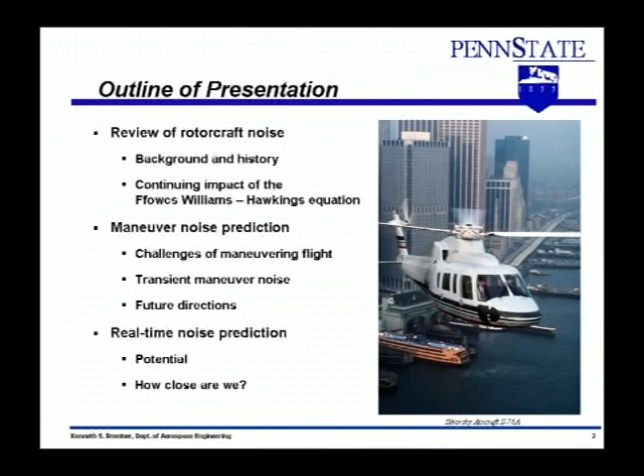Really, I probably should have gone before Jean, because I want to give just a little bit of an overview of rotorcraft noise. I know most of you don't work in rotorcraft, so I'll keep it at a light level. I'll talk about the maneuver noise predictions we've been working on for the last few years, and I'm very happy Guillaume Perez is now working on Aero, carrying that on. Then I'll talk a little bit at the end about where real-time noise prediction is going, which I think is fascinating.

Of course, the rotor environment is very complex. The blades are quite flexible, we have to calculate their elastic response. We have to worry about a vortex impacting the blade. In high-speed flight, we have shock waves on the advancing side, but on the retreating side we have dynamic stall. The wake from the main rotor can interact with the tail rotor. You have to do all of these things right to predict the noise, so it's a very complicated problem. Very good job security.

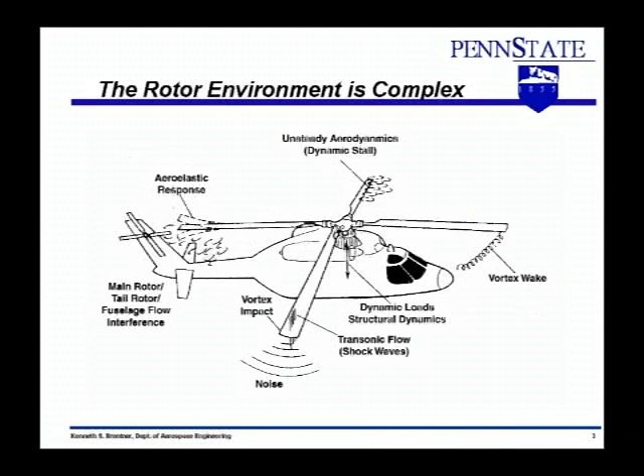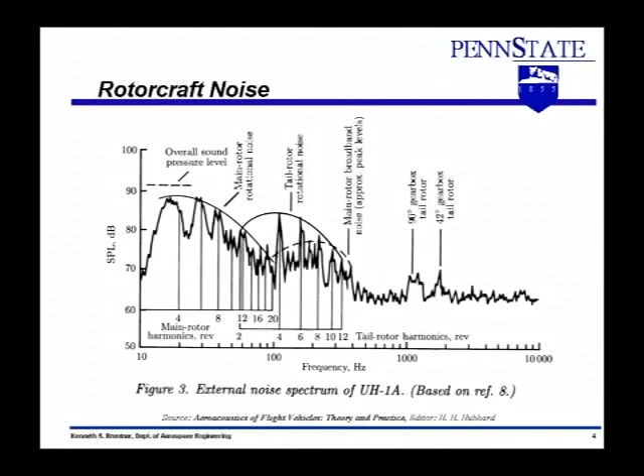Of course, when you look at the spectrum for rotorcraft noise, we have main rotor tones, tail rotor tones, even things like gearboxes. If you've ridden on a helicopter, you know that can be very annoying inside the helicopter. So there's quite a few things going on. I'm concentrating on main rotor noise right now, but as we look towards maneuver, we have to consider tail rotor and other sources.

Historically, Gutin and Ernsthausen and Deming started working on propellers early. In the 60s, early 60s, the importance of unsteady loading was recognized. Most of the main mechanisms were proposed in the 50s, although the names have changed somewhat. But there was really a dividing line here in what we were able to do and the level. It was mostly experimental with some theoretical work. But in 1969, when the Ffowcs Williams-Hawkings equation came out, I really think that's been a watershed and gave us the tools that we needed.

However, Farassat and others started the rotor noise theory at that time following Ffowcs Williams, but the computer power was quite limited back then, and we didn't have a very good idea of blade loading. Instrumentation was also not nearly as advanced as now.

In the 1980s, when I started getting involved, there was quite a bit of code development. In the US, there was the NR squared, the NASA rotorcraft noise reduction program sponsored by the AHS and the industry. A lot of industry people got involved. Joshi, I think you were involved in that program probably, right? At Bell at the time.

In the 90s, well about 1988, Farassat and Myers published the Kirchhoff formulation for moving surfaces. By the way, I don't want to forget to mention, Farassat sends his regards. He very much regretted not being at this meeting, but many of you might not know he just had surgery, a cancer in the mouth. I got an email this morning from him that he's doing well, and he's grown a mustache and sideburns.

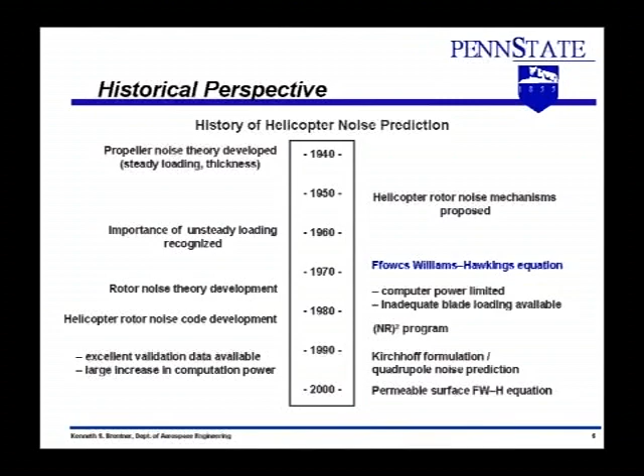But anyway, from about 1988 till about 1998, the Kirchhoff formulation was very popular, and now it's dead for rotorcraft, in my opinion, because we've replaced it with the permeable surface Ffowcs Williams-Hawkings equation, which you've heard about. The main point of showing you this is, I think, very important: 35 years later, the Ffowcs Williams-Hawkings equation is still the most important tool for discrete frequency noise prediction in rotorcraft.

This is after 10 years or more of CAA. This is true, and you've seen it in all the presentations, that Ffowcs Williams-Hawkings is still very important. In fact, we're using it to do things it was never intended to do, I think. We're beginning to calculate true broadband noise, trailing edge noise, literally any kind of noise source. I think that's a real tribute to the equation.

This is one form of it, the way that Farassat writes it. For those of you who don't know, I was at NASA Langley for many years under Farassat's guidance. It was actually Jay Hardin, though, that suggested I go study with Shon. And it's the Ffowcs Williams-Hawkings equation, as you'll know, a rearrangement of Navier-Stokes. That's the most general form, I think, of the Lighthill acoustic analogy.

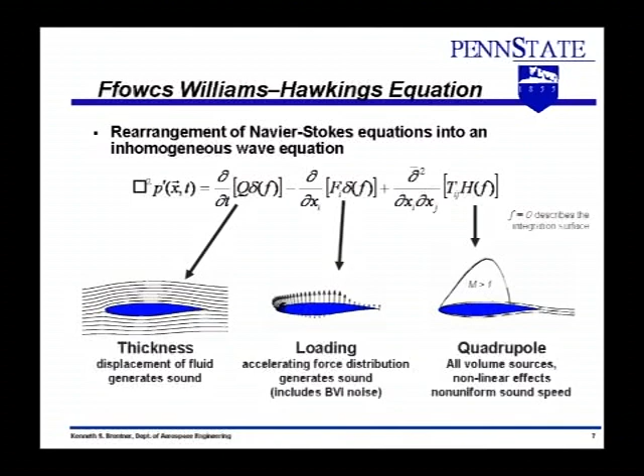The monopole term represents thickness noise, the dipole loading noise, and we still have a quadrupole term if you use the actual blade surface for the surface. If you have a permeable surface, there's no real physical meaning, and as Shon taught me, you can rearrange these sources in all sorts of different ways, so you shouldn't get too attached to them. I think of them as mathematical sources, not physical sources generally.

When we're using these terms, we have several approaches we could use. The acoustic analogy - we could integrate over the surface and over the whole volume, and that should give us an exact solution. In fact, we've done that for helicopter rotors in high-speed situations. Typically what we do, though, is neglect the quadrupole term because integrating over the volume is difficult. Even today, getting that volume data accurately, time-dependent, is difficult. So we typically neglect the quadrupole and just do a surface integration.

Now, the Kirchhoff formulation was attractive, and the reason it gained such popularity is because CFD could provide unsteady data on a surface. A surface integration is much simpler and computationally efficient. The Kirchhoff formula was based upon the wave equation, though, not Navier-Stokes and conservation of mass. What we've shown a few years ago was that it's really inappropriate for most rotor noise prediction - not because there's anything wrong with the equation, but because the input data we use is not suitable. It contains fluctuations in pressure and velocity that are not a solution to the wave equation. But the Kirchhoff formula doesn't know that. If you put the wrong data in, you'll get the wrong answer out. And that's what we've been able to show.

So the Ffowcs Williams-Hawkings equation, on the other hand, is essentially the same amount of work, very similar input data, but it's based upon the Navier-Stokes equations, and we don't have that problem. Another thing we could do is direct computation, but that, for a long time, will be limited to the relatively near field, and it's needed to provide input data to the other approaches.

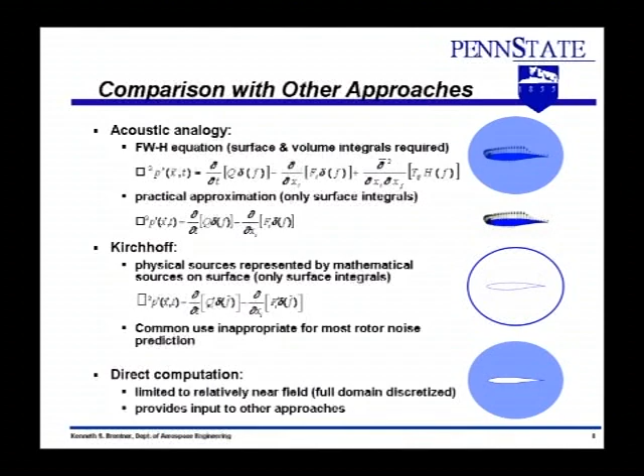So what we've been working on the last few years is maneuvering flight. How is that different? Why is it a separate problem? Well, first of all, in a helicopter already we have blade motions - the rotation, flapping. If you're a helicopter guy, you have to deal with this at some point. You have the pitching, all these things going on.

Well, now in maneuvering flight, you have the pitch and roll of the aircraft, and you can have transients. The time scales are much longer. For periodic motion, it's one blade passage, on the order of milliseconds. In maneuvering flight, it's the whole maneuver you have to calculate, so computation becomes an issue. The loads for each blade are no longer the same as in periodic flight, and the motions are different. And there's an increased possibility of interacting with the rotor wake, as John has already shown us.

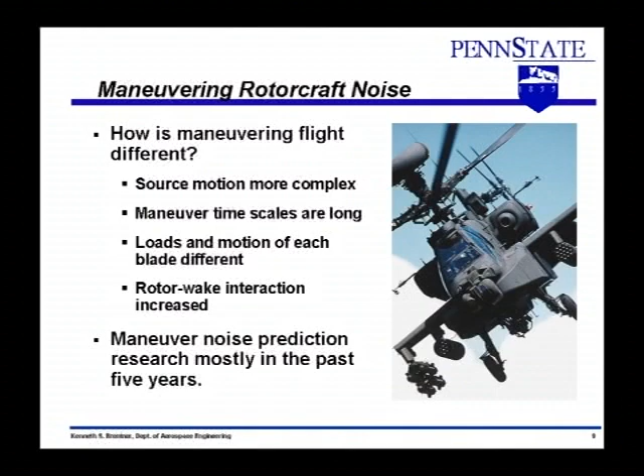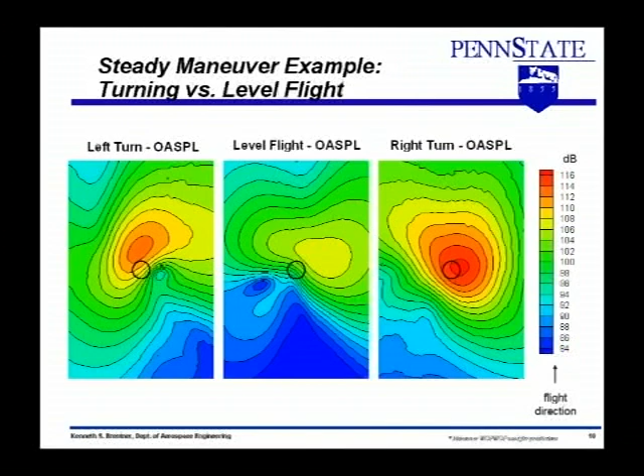In the past, there's been very little work done on predicting maneuvering flight, or even measuring it. Most of it's been done in the last 5 years. Just a simple example - and this is without blade vortex interaction noise included. One of the first things we did, just to show you, if we look at the overall sound pressure level on the ground for a helicopter doing a left turn, level flight, or a right turn, you can see that we get more noise in the turns, and it's not symmetric because the helicopter itself is not symmetric. So we get this kind of result right away.

What I've been interested in primarily, because we were one of the few people that could do it, is looking at the noise in transient maneuvers, what I call transient maneuvers. For example, one of the first cases we considered - and it was probably a poor case for the capability we had - is a helicopter in descent, where we would increase the collective pitch, increasing the angle of attack on all the blades simultaneously to stop the descent. Essentially, the rotor would produce more thrust. Here you can see the collective pitch: at half a second, it was increased by 6 degrees, and then by 1.5 seconds, it was back down.

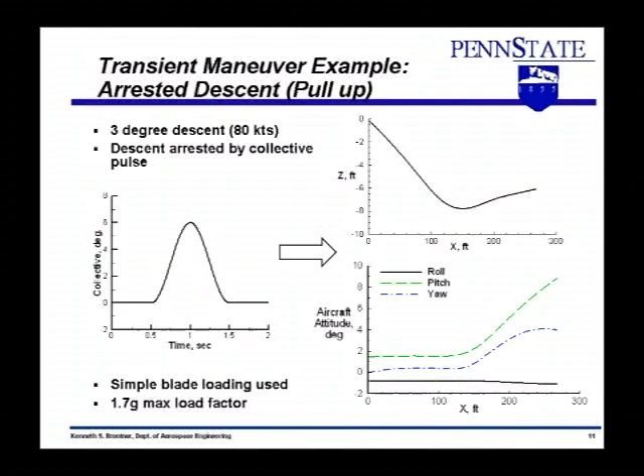And what happened is the aircraft pitches up. It yaws a bit because we didn't include tail rotor or pedal to stop the yaw as it produces more thrust, more torque. And we actually fixed the roll degree of freedom in our calculation for simplicity. It's one of the first calculations.

For an observer that was initially underneath the helicopter, you can see the helicopter in steady descent. This is acoustic pressure versus time. The green line is steady descent. The red line is the increased noise we get during a transient descent. So we get 3 to 4 times the amplitude of the acoustic signal over this short duration.

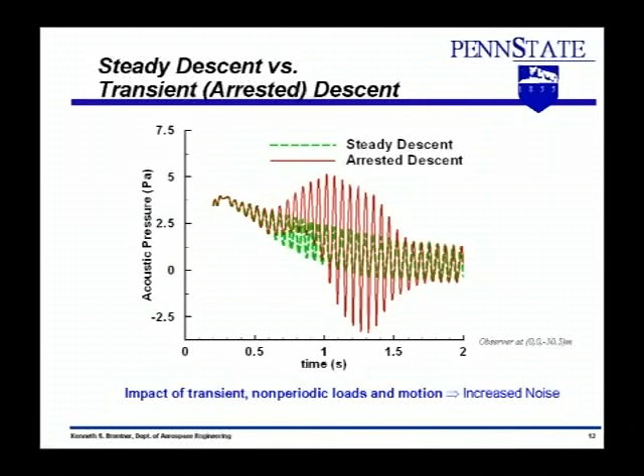This is without including the wake and blade vortex interaction, which is quite important. So in a transient, we can get a big increase in noise, and that's been neglected through all the years.

When we look at the contours on the ground, this is the Y direction, X direction at different times, as indicated. The top row is a steady descent. The bottom is a transient or arrested descent, pull up. This black circle represents where the helicopter rotor projects onto the ground plane.

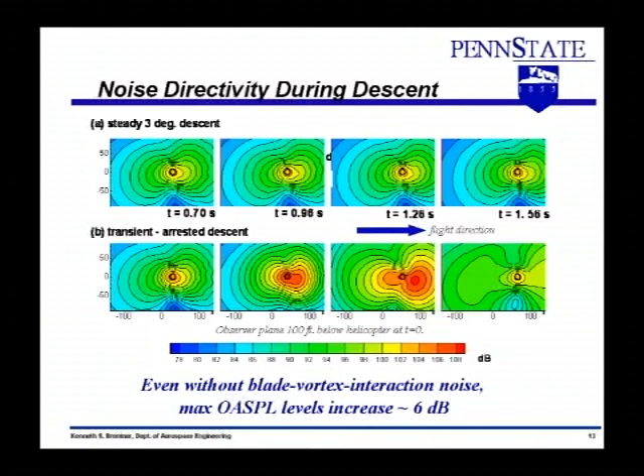You can see essentially in a steady descent, it's just moving, the pattern's moving along. It's getting a little closer to the ground, but only about 6 feet. In the transient case, you can see a large increase in amplitude on the order of probably 6 to 8 dB, maybe more. And that doesn't include blade vortex interaction.

So what we did is we teamed with the University of Maryland, and we coupled with a flight simulation code called GenHel. This is actually used by Sikorsky. They developed this particular version for NASA Ames, and they use it in flight simulators. The pilots are studying the flight dynamics of the aircraft.

We took the aircraft motion and blade motion from GenHel, gave that to the University of Maryland, Gordon Leishman and his students. They have a maneuvering wake code. They calculated using a free wake the blade loading and the motion of the blades, the flapping motion. We put that back into our code PSU-WOPWOP. We also could go directly, and then we could calculate the maneuver noise with BVI.

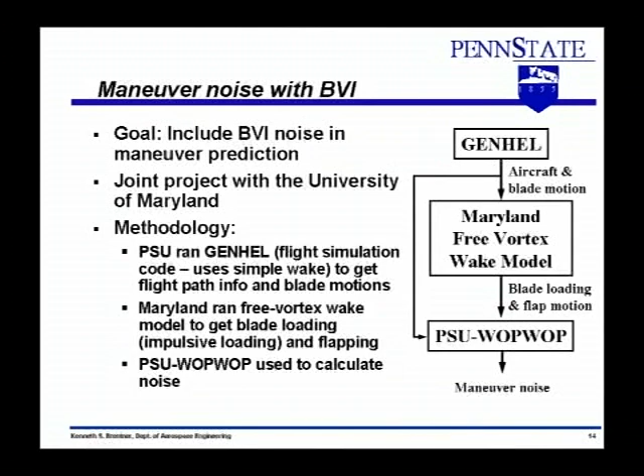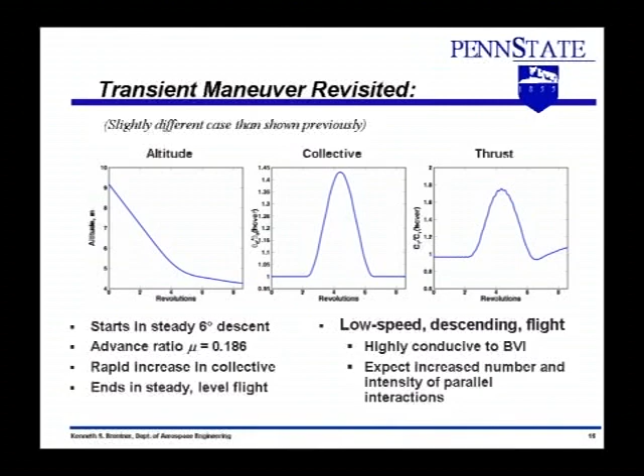We include the collective pitch like that. And then the thrust on the rotor, you can see, increases. So we expect the noise to go up due to thrust. It turns out it goes up more than just the increase in thrust. I'll show you plots of the loading on the rotor disc.

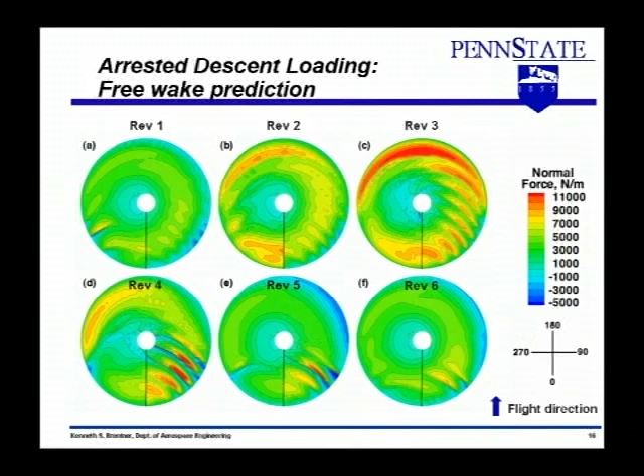And the BVI does increase, but it doesn't increase exactly the same way. And we think it's quite likely that BVI may turn on and turn off during a maneuver if you're flying into the wake or other things. That's something we really want to study because it's obviously important.

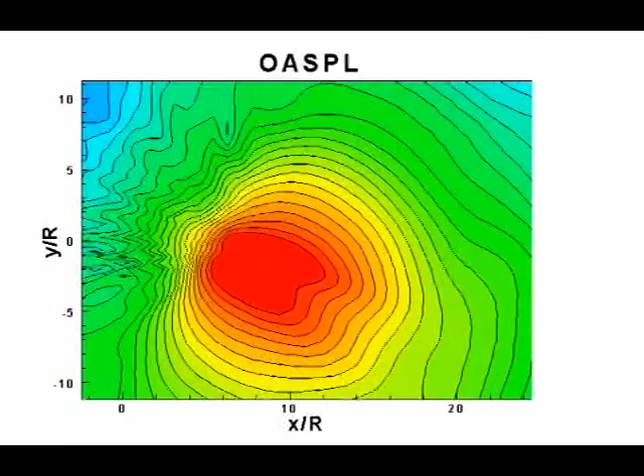If we look at the animation, the helicopter's going here, I'll play this a couple of times, or try to at least. Let's see. It starts out with retreating side, advancing side BVI, and goes back.

Okay, now I want to go forward. Let's see if I can do that. Here is the time history as we go around. I don't remember why there's two rows right now, but essentially you can see the same case.

Retreating side BVI from the retreating side propagates normal to the blade. As you go in time, you'll get advancing side BVI, a couple of distinct ones, and then later on it comes back more to retreating side BVI. I think this is probably thickness and loading noise, but I don't remember at the moment.

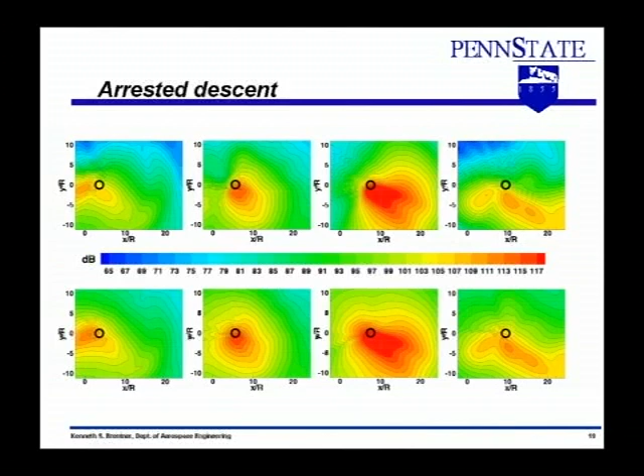Then we've looked at a more complex maneuver, this case again without the BVI or the wake included. I need to start this. We looked at them. I hope this will run.

Oh well. I'll show you some other plots of this, but essentially we looked at a maneuver where we start in level flight, do a climb up about 100 feet, then stop the climb, level flight again, go into a 90 degree or 180 degree bank turn and out.

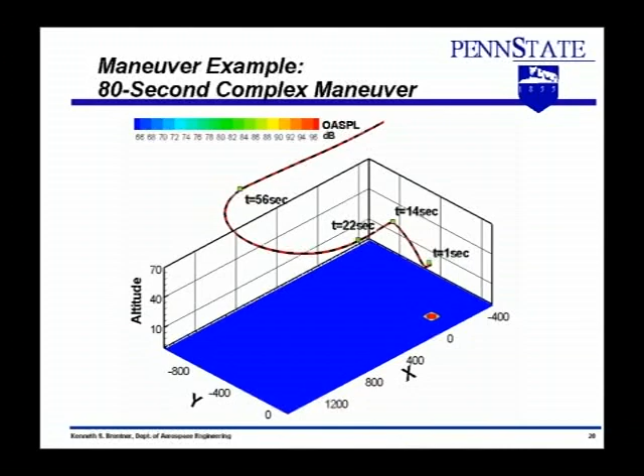And I'll try one more time. Oh well. Very nice animation—I'll show it to you some other time.

But it's quite interesting. In the animation, we can see every time it changes the flight state, you get large radiation of waves going out. So like when you turn into the start of the turn, that transient is very important. You can see it here.

What I want to point out is if you look at either of the noise sources, there's some rough correlation, but it's not very clear what's going on. It's certainly not related to the overall rotor loading.

If we look at observers moving with the helicopter, on a surface fixed to it, when we look at the thickness and loading noise, we see two events popping out. Those are when we enter the turn and when we exit the turn. For this particular maneuver, these events, if you look at the total noise, can be variations of up to 10 or more dB, which are very significant over a short period of time.

Okay. I did load them, I did even test them earlier. What's that? I certainly did that. Let me see if I can... No, they're actually in the presentation even. Oh well, as usual, I have a backup.

I'll just show you some isolated observer points. In this case, what we looked at, you can actually see what's happening. There's the thickness noise, if I showed you those plots.

Essentially, the pattern varies. If I look at a sphere following the helicopter, the pattern shifts around, but the amplitude doesn't change. The loading noise, however, the amplitude goes way up for a moment and then goes back down. So there are different mechanisms going on in this transient noise. It's quite interesting, and we wanted to understand that.

So we looked at a single observer again with overall sound pressure level for thickness and loading noise. And since we're doing computations, we could do fictitious maneuvers. What we would do is take, in this case, the blade motion from steady level flight.

Just the rotor blades, the flapping motion primarily, and do everything else from the maneuver. So the aircraft's moving around, but the blades are moving like they're in level flight. And essentially, there's no difference, or very little difference, in both thickness and loading noise. The loading noise shouldn't change, other than the position of the blades being slightly different.

Then we fix the roll motion of the aircraft. So the aircraft's banking into a turn, but instead of letting the aircraft roll like it should, we stop that. It just goes around level. The roll motion had a very strong impact on the thickness noise. The fact that the aircraft's rolling changes the velocities, changes the thickness noise. Not too much change in the loading noise.

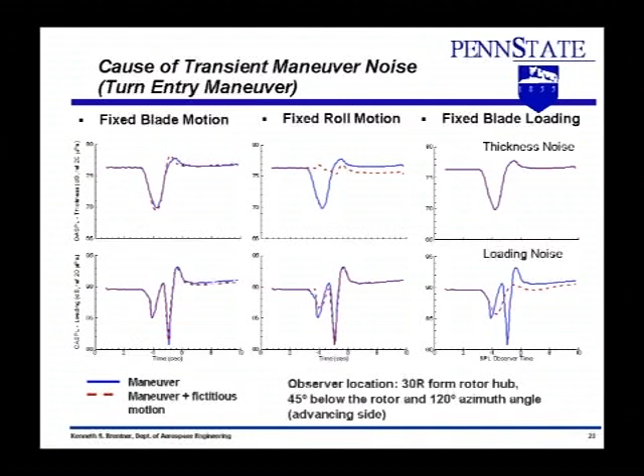Then if we took the fixed blade loading, the loading on the rotor blades that they would have in steady level flight, and let all of the aircraft motions be the same as in the maneuver, the turn, we see quite a bit of this peak is essentially gone. We still have some change in the loading noise because of the motion, but that peak disappears. So in fact, the transient loading that's going on in the helicopter accounts for a significant increase in the noise. And if I could just show you the animations, that would be good.

So in a civil application, you want to make nice, gentle maneuvers. Very true. Good. Military applications, that might not be possible - you might not want to turn very slowly in enemy territory.

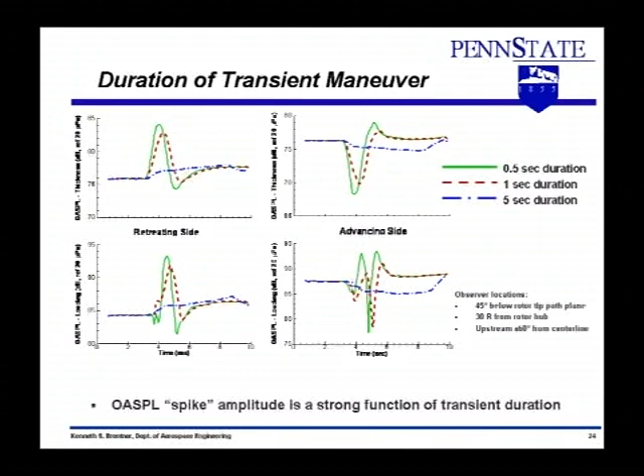So, what about real time? That was the first thing in the talk. Why did I talk about real-time noise prediction? Well, one thing that happened is when I went to Penn State, started working on maneuver noise, I was working with Guillaume Perez and Guillaume Bres, students, and we really analyzed the numerics in great detail. We looked at even counting operations between different algorithms to see which was most efficient for different problems. And for maneuver noise, we chose a forward time type of thing, like you're using it on Aero.

And the results were that the calculations were very fast. In fact, to do real-time noise prediction, what we're talking about is we'd like to be able to predict the noise as it occurs so we could use it in a flight simulation. Effectively, we would like to be able to have a pilot in the loop, and as he flies it, we could predict the noise at least at one observer location. And it's still a first principles kind of prediction - we're not trying to make a lot of approximations along the way.

I think this is actually amazing that we can even think about this. Why would we want to do that? I think after we found out we think we can do it, the why comes up. Well, first of all, just if you're doing normal calculations, a fast turnaround time would be advantageous - that way we can do all these observer positions for contours. But we want to also do pilot in the loop simulations, so we can think of having the pilot fly in such a way to be quieter.

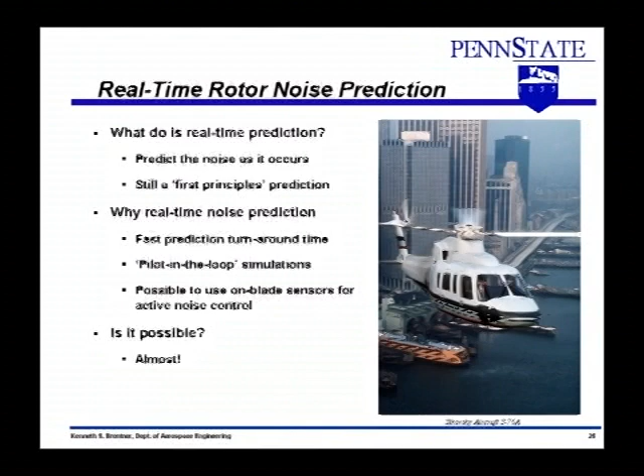For our test case I showed you with the 80-second maneuver, we did that calculation on a single processor, fairly high speed but not the fastest anymore, a 3.4 gigahertz Pentium 4 processor. The GenHel flight simulation calculation for the 80-second maneuver now takes 1.85 seconds total, and it, of course, is real time. This used 20 radial segments for each rotor blade with 4-degree azimuthal resolution.

Not quite enough for BVI, but not too far away. PSU-WOPWOP takes 44.5 seconds, about half of the total 80. We're using a surface for thickness noise that's a 10 by 10 grid on the upper and lower surface - very sufficient resolution for that.

We're using 15-degree azimuthal resolution, which is fine for thickness noise, and 20 radial segments for loading with 4-degree resolution, which is nearly enough for BVI. We can use sufficient resolution on today's computer with a single processor. We're in the process of reorganizing the code so we can do that, so real-time appears feasible today with first principles noise prediction.

We're using a compact chord-wise loading model. That's the one approximation we have to get this fast loading time. But thickness shows you that we're pretty close even without that.

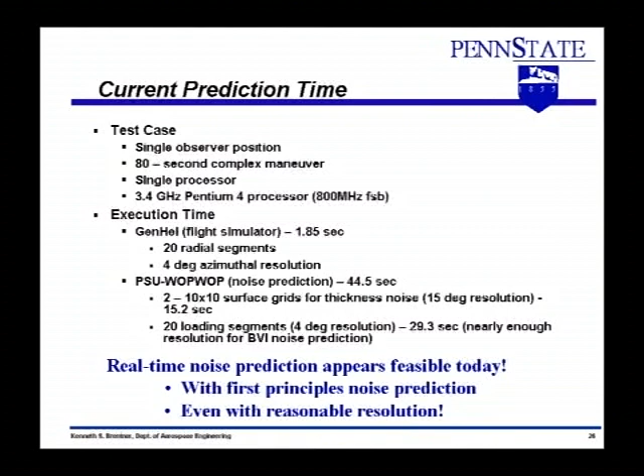Our application is we're developing a flight simulator for rotorcraft at Penn State for education and research, to look at flight dynamics, flight control design, and cueing systems. One thing that's unique is that we have acoustics. We spent less than $45,000 on this, most of it off-the-shelf components, and it's designed for flexibility and ease of use. We want to minimize training time because we have high turnover in an academic setting.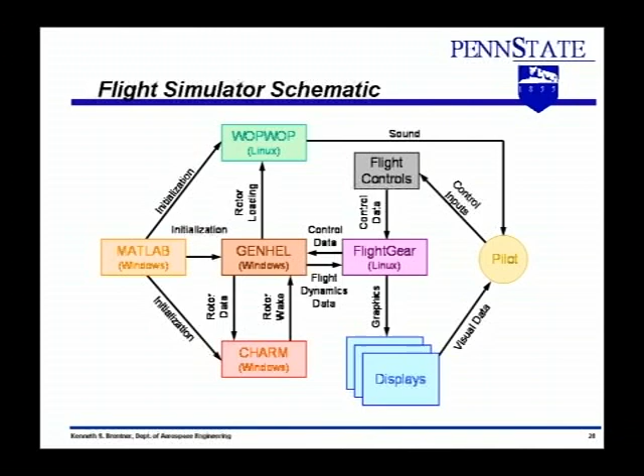We have several graphic displays. We call this whole setup a graphical cluster. The pilot sits here and controls these different codes. I'll show you a picture of our flight simulator.

We have three 42-inch plasma displays, chosen because they're quite bright, so it's very vivid sitting in it. We have four LCD panels used for the instrumentation panels, and we also have an operator station, a seat, and a control stick. But unlike other flight simulators, we have a couple of very big subwoofers, and we can really shake the whole lab up with those. You have to have that for rotor noise because the frequency content's quite low.

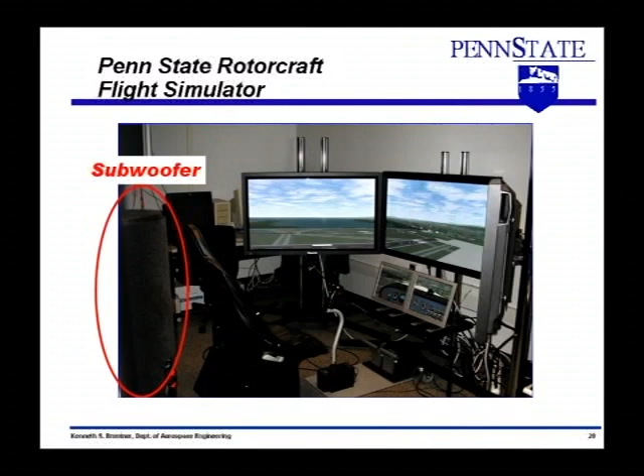This is someone flying it. I was going to bring the flight simulator on my laptop because we could actually fly it, but I'm not very good and I didn't want to bring a joystick along. But this is an example, and this is one more animation that probably won't work either. Is the sound turned up back there?

We took this to the American Helicopter Society forum and had pilots flying it. At this point, the pilot would fly a maneuver like this, and in about 60 seconds we could calculate the sound and play it back, viewing the helicopter from the observer position. So we're almost real time now. Hopefully in 6 months or so, we'll actually be able to do it as you're flying, and then I'd have to bring the whole kit.

In summary about rotor noise, I could skip some of this because Shon has gone through some of it. Rotor noise prediction capability is quite advanced. But I think that maneuver work is not only groundbreaking, it's really important because real helicopters always maneuver—that's the whole utility of a helicopter. Aside from that, we have gusts and other things, so they're never in steady state flight. The Ffowcs Williams-Hawkings equation—the title of the paper was 'Sources in Arbitrary Motion'—we're really doing that to a very large degree. Real-time noise prediction is very exciting, and the students love working on it.